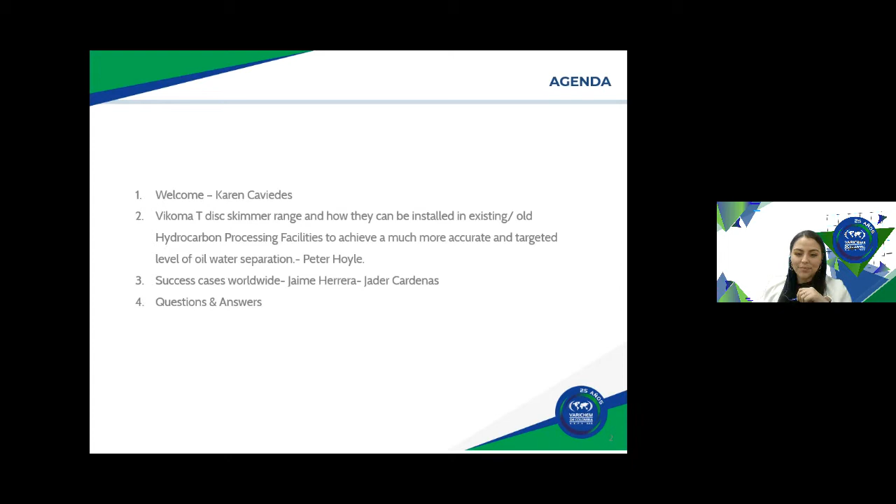Okay, right. Okay, well, good morning everybody. Good afternoon if anybody is tuning in from the UK, where I'm currently sitting. Thank you, Karen, for the introduction. It sounded just as good in Spanish. Thank you for your time today, everyone attending.

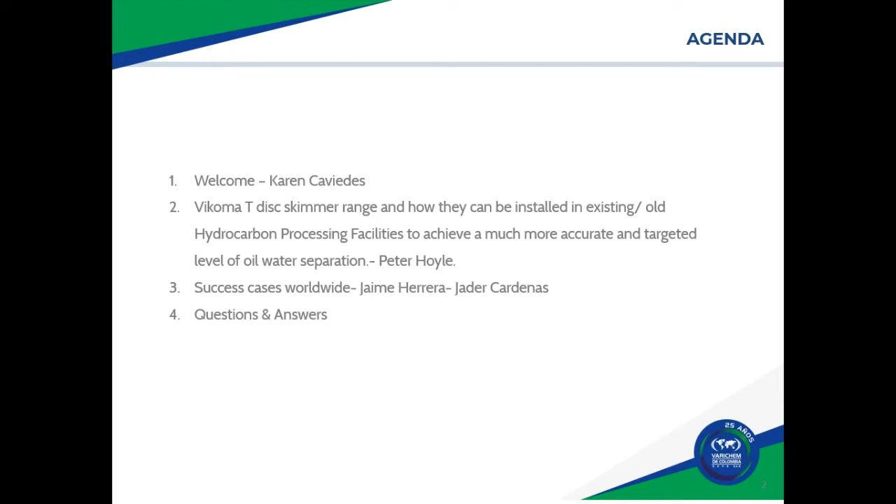So yes, today's discussion is going to be the effective use of skimmers to retrofit or upgrade existing petrochemical facilities. It's quite focused, but hopefully it should be of interest to each of you, and we can explain some of the areas where Vikoma are able to provide solutions here. I will hopefully not speed up, because I do appreciate we have a majority of Spanish speakers, but there are some visitors from North America, the USA and Canada. So, okay, a brief summary of the problem.

Petrochemical facilities are designed and built with a maximum throughput in mind, generally the number of barrels per day that the facility can process. A key part of the process is separating the oil from the wastewater that's used in various steps, whether it's cracking, cutting, dilution, or what have you.

The water separation can be done in a number of different ways, using dedicated separators or separation ponds or pits, whatever the process requires. Essentially, for the separation of oil and water to be successful, it does need time so that two clearly defined layers can form, with oil resting on top of the water.

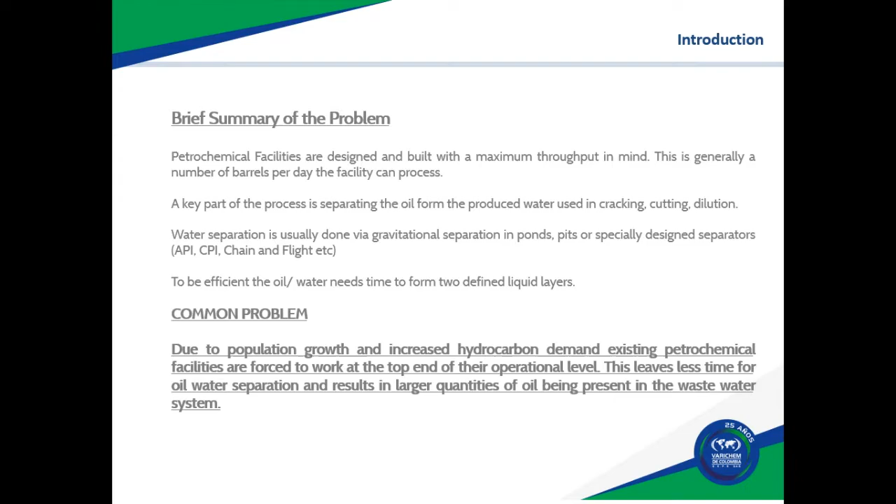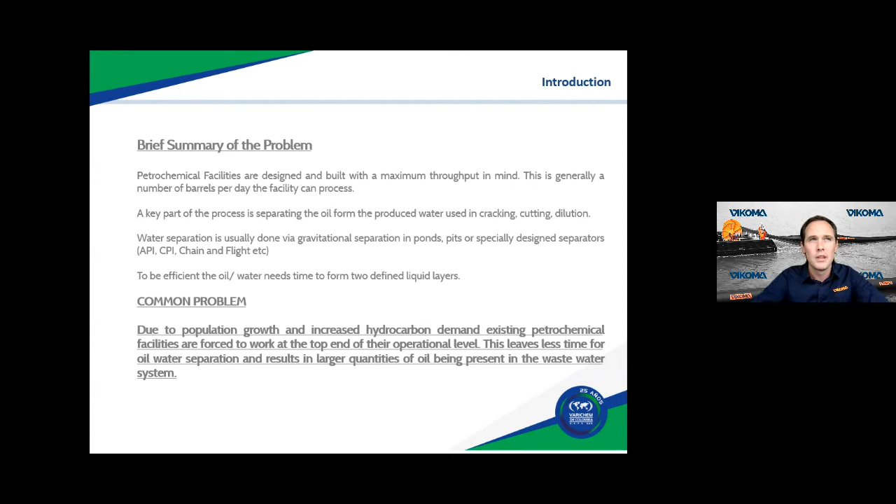One of the other problems we see, if a facility is working to its operational limits, is the fact that populations are getting bigger and people are always moving closer and closer to refineries or petrochemical facilities, which, as we know, because of the nature of the products, can smell of hydrocarbons. You can get VOC gases in the air.

With populations moving closer, it's important to manage the volatile gases in the air that could be near housing estates or villages, what have you.

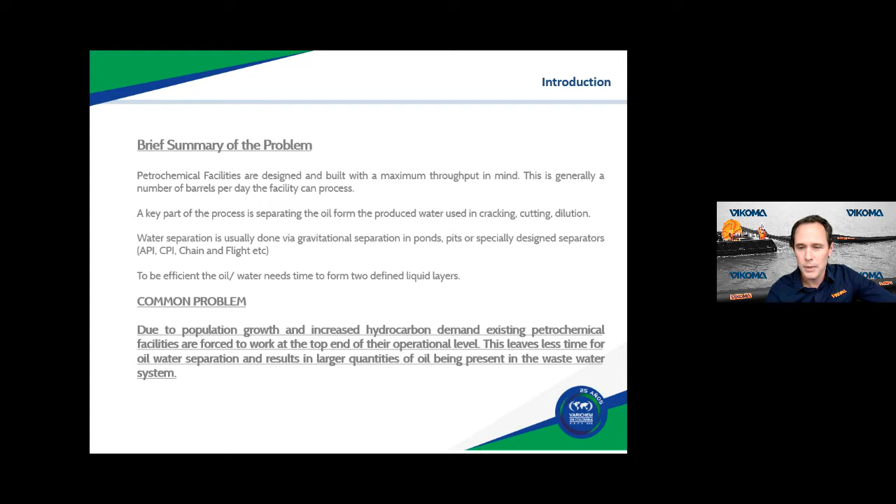So there are two solutions for excessive oil and water buildup and not giving the facility enough time. The first solution is very simple: build a new refinery or new petrochemical facility, which is great—build a new one and everybody's happy.

As we all know, this isn't viable because petrochemical facilities cost an awful lot of money to manufacture—that's the facility itself, let alone the infrastructure that needs to supply that refinery or petrochemical plant. So that was put there as an example solution, but it's not viable for people to spring up and build a new refinery every week.

So the second solution is much more attainable and achievable: to upgrade or retrofit the existing facility so that it is capable of separating higher amounts of oil and water within its process. By helping that system along, making it more efficient and more accurate, the whole facility can process at the higher end of its requirements.

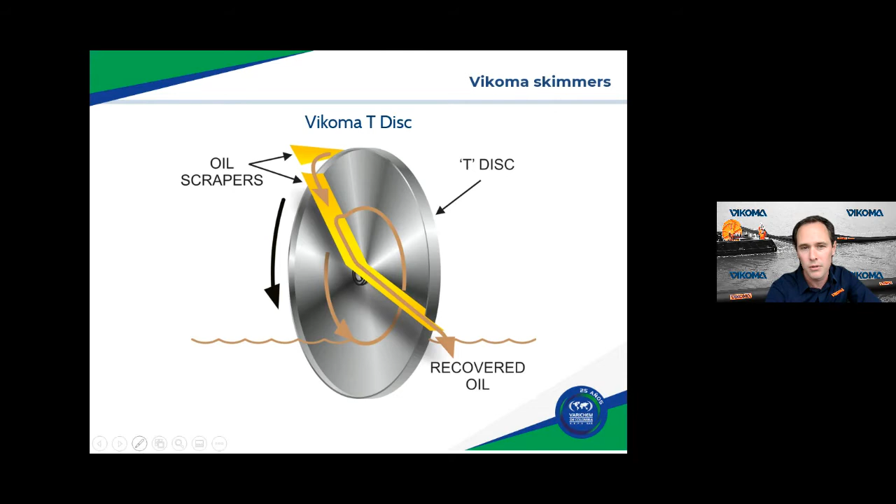So the benefits we have for upgrading and retrofitting an existing facility with industrial skimmers include large cost savings.

It's for a short outlay of cash at the start of the project. These things will last for an awful long time, and they increase the efficiency of the system.

Because of the efficiencies, because they select only the oil and not the water, the oil is much more useful. It has a lower free water content, and it can be reused if filtered.

So once set up and running, these systems are designed to be worked as part of the process. They can be left unattended. They do not need a physical operator to stand by them and use them. And that goes with the safety alarms as well, which we'll cover a bit later on.

They are relatively quick to set up, so you do not need to close the petrochemical facility to install one of these things. It's much like a bolt-on or a drop-in system that can be added to an existing pond or separator, so it doesn't require that separator to be decommissioned and taken apart for this to be added. I covered earlier on they're highly efficient.

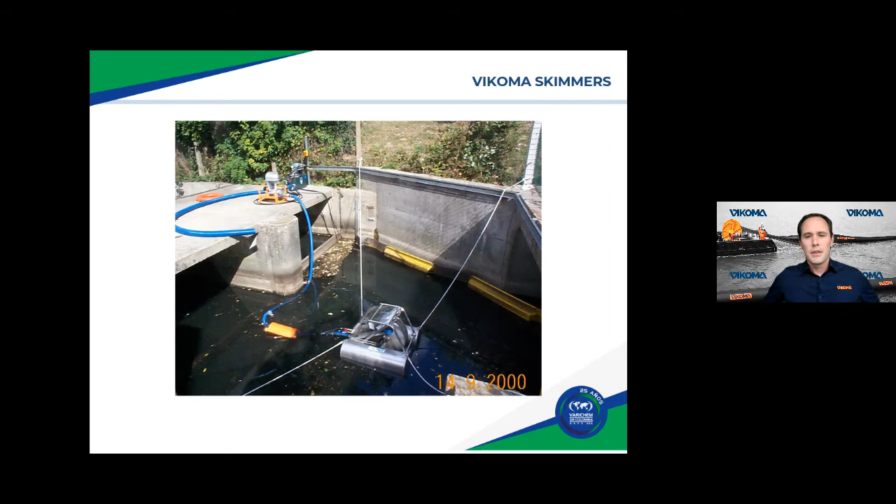Okay, and here's another version. This is called the T9 skimmer. As you'll see, slightly larger, and because it has a few more discs, it can recover more oil. And yet again, placed in an outdoor lagoon where the oil and water is left to settle.

Now, the reason we started off focusing on the ponds or pits, whatever they're called in your facility, is these are not controlled with the level of fluid that runs into them. So for example, the water level or the fluid level within these pits and ponds, depending on how much has been pumped in, can vary. It's not like a dedicated oil water separator which will have a constant level.

This system that you can see on the slide in front of us, if you look closely around that pit, you'll see a week or two before there was high rainfall and the pond or the pit had overflowed the edges. There was still secondary bunding around, but it's a good example to show that the levels of liquid in this pond will increase or decrease. That could be the time of year or the amount of work going through the process.

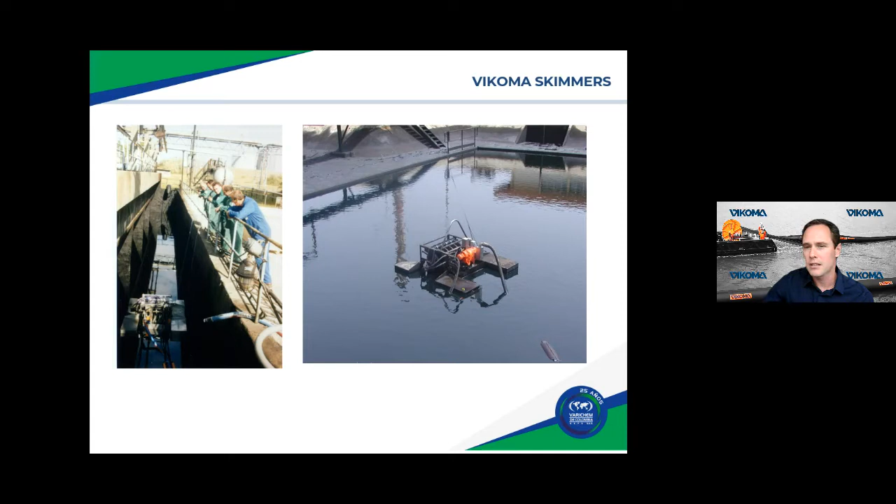I think this is actually a different photo to the one earlier, but it's another floating T9 skimming system, and you can see that the surface of this pit is clear of large clumps of oil, and therefore the volatile gases in the air, the vapors, are reduced massively.

Now these are reduced very, very quickly, which is a good thing if populations are starting to move closer and live closer to the refineries, to the petrochemical plants. They won't be having that fuel forecourt smell in the air continually.

So these systems are designed to run slowly and smoothly, 24 hours a day, 7 days a week, every day of the year. So the yearly maintenance for these would be within 2 hours maybe, a check over to check the pump or check the scrapers on the discs. They're not designed to expect high levels of maintenance on a regular basis. It simply doesn't happen.

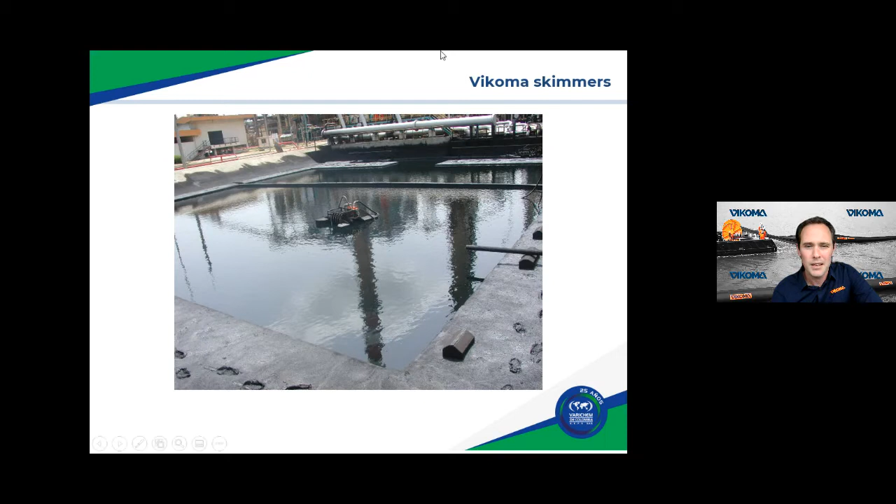So we've briefly talked about the skimming systems, and that works on the same principle as a marine oil skimmer. The disc travels into the oil and water, the oil sticks to the disc, the water does not, and then the disc is rotated through the scrapers and the oil comes off.

Normally, if this was a marine oil spill or in a river, because that spill could happen anywhere, it's very common to use diesel engines that drive a hydraulic system. Within industrial facilities, we're very lucky because we know where the oil and water needs to be separated, in the separators, in the ponds, in the pits. So a dedicated power pack can be plugged into the site supply.

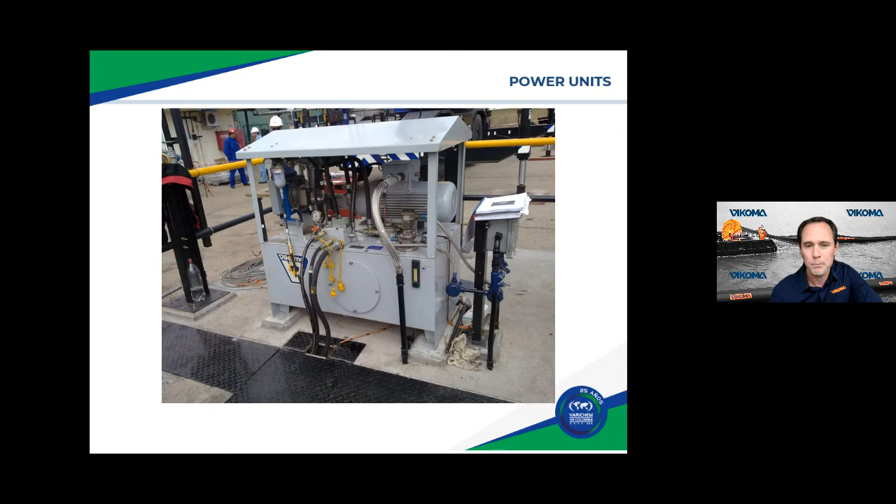Some of the things that make these systems very different, whether it's a T6, the T9, or even the largest T14, would be, first of all, the materials that the systems are made from. These systems are made from a number of different materials depending on the chemical composition of the pond or the pit that they're in. So it's very common to use stainless steel 316.

However, it often happens that there are caustics, high levels of caustics, fluorides, sulfides. Then we can design and build the skimmer out of different types of metal, so hardened steels, duplex, super duplex. That is part of the engineering towards these systems, because if we find out that these are in sour water or a high chloride solution, simply changing the metal that it is manufactured from could mean that the system lasts for many years before the aggressive substances start to damage it.

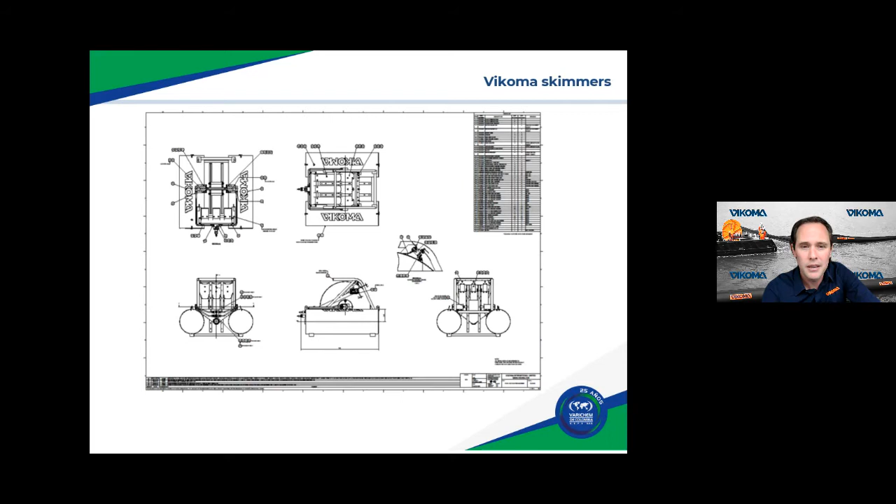So this is the T6, the smallest unit. You'll see it is hydraulically driven, but it does not have a transfer pump. So this would normally have a freestanding transfer pump accompanying. Next slide, please, Karen.

Depending on the customer's requirements, these pumps do change. Sometimes there is a requirement for it only to pump the oil a short distance; other times it's a much increased distance. So that is captured within the document package and requirements by the engineers who design the system. We appreciate that petrochemical facilities all over the world are different. They deal with different oils and different products, and they have to transport that oil to different destinations. So therefore the systems need to be quite bespoke to suit their exact area of operation.

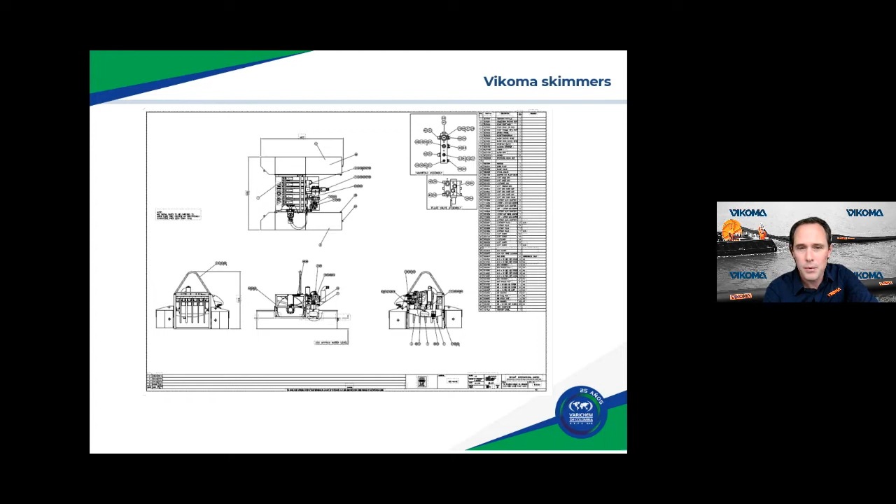So I started off mentioning the high efficiencies. These skimmers will collect between 95 and 98% oil, less than 5%, between 2 and 5% free water. The conventional methods for skimming that oil, like I mentioned, the overflow technique, rely on an operator to accurately operate the overflow valve so the oil flows first. If water is captured in that surface layer, then that goes as well, and it all adds to the oil-water ratio. So the T14 can do 14 cubic meters, or 14,000 liters, of almost pure oil per hour.

And quite often when these systems have been installed, that oil has such a low water level that it has a value, it has a use, and it can often be used to drive the slop system of the petrochemical facility with very little extra process. So by targeting these high amounts of oil and leaving the water alone, in the first phase of interception, the first oil-water separation, it drastically takes the pressure off the rest of the process downstream from that.

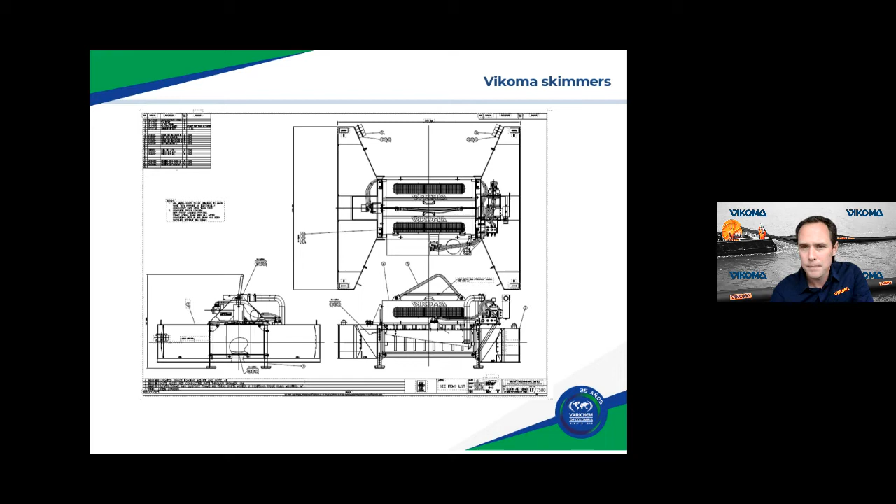Essentially, whether it's class zone classifications or ATEX, it doesn't really matter to us what classification body the facility uses. The equipment can be built with its area of operation in mind and comes with its documentation package. So if, due to a number of chemicals the facility is dealing with, the area is very volatile and explosive, it could be an ATEX Zone 1 or Zone 0 skimmer, ATEX Zone 2 or Zone 1 power pack and pump.

Essentially, we capture all of these details at the initial inquiry phase, and all of the design and engineering work is done with the exact facility in mind. These systems wouldn't work as an off-the-shelf catalogue product, because one facility might need an ATEX Zone 0, while another may not require it at all — it may only require ATEX Zone 2. So they are very bespoke, but our in-house design engineering team are specialists at this.

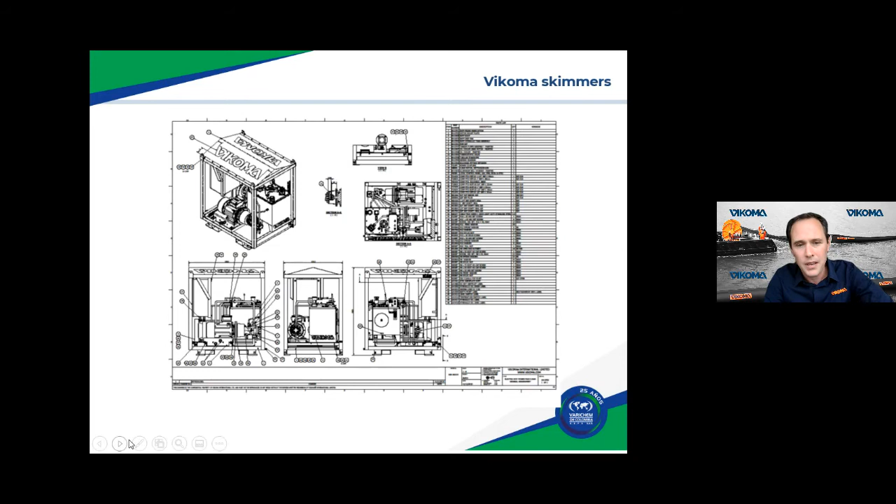So next slide, please. Okay, I put this in.

It's a very new project, currently being installed, but it's a good way of showing that now that solar technology is developing, these are being used to run process equipment within some of the petrochemical facilities.

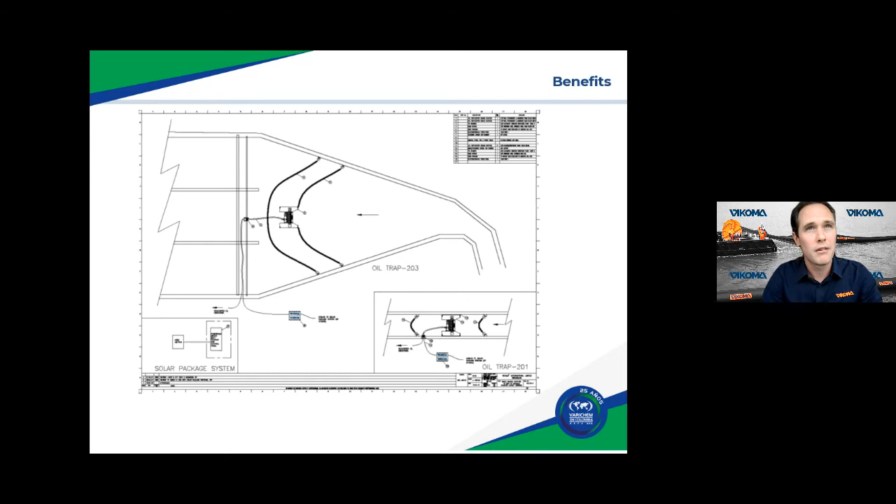I wanted to put this one in just to show that there are developments out there for environmental purposes, in case the environmental legislation is increasing in your particular facility. These things don't just have to be plugged in and sucking power from the grid, when solar options are there to assist.

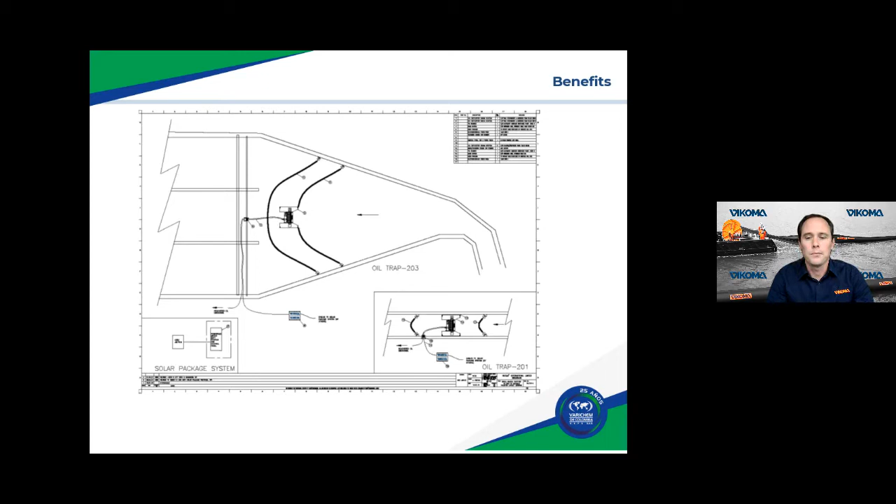Next slide, please. So I've included the technical data sheets for the skimmers. I've shown some of the images, and assuming with your access to the presentations in English or Spanish, anyone watching this will be able to look at the data sheets to get a rough idea.

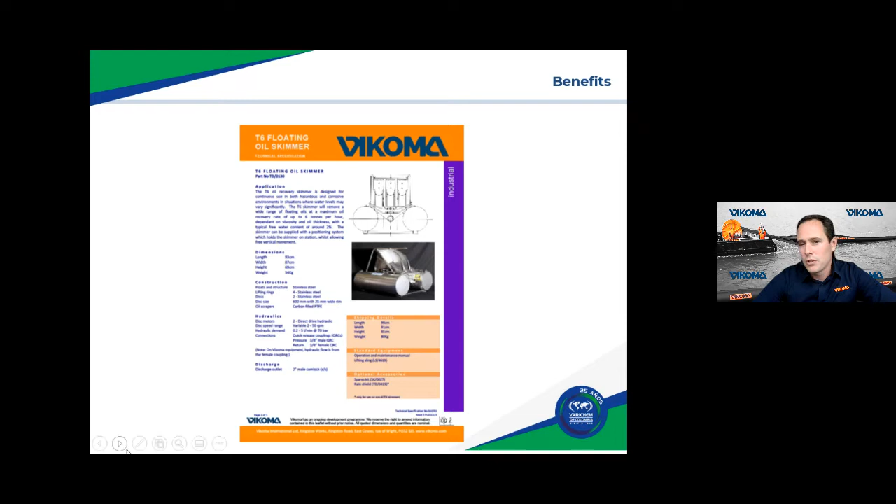If we need only a small skimmer because the pond is relatively small, then you may need a floating T6 skimmer. Likewise, Karen, if you can flip through, we should then move to the T9 and then to the T14. This should help give a bit of insight into the types and sizes of the skimmers and the amount that they can recover.

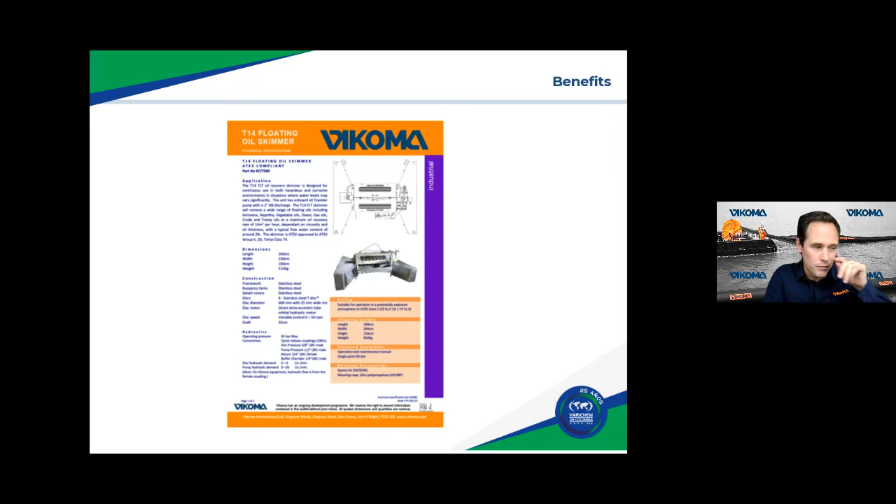What I would say is, if anybody attending this knowledge experience thinks that the industrial skimmers could assist in upgrading their facility, you don't need to make a decision on the technical specifications shared today. If you reach out to Varichem, or to myself, or to the regional representatives of Vikoma if you are not in Colombia, these items are put forward as a very tailored package.

We could provide a site data sheet to understand which chemicals are present, how much oil needs to be removed, if the water level changes, and how far the oil needs to be pumped. All of these things are captured to make sure that the right equipment is specified at the start. These are just a useful point to look at. Next slide, please.

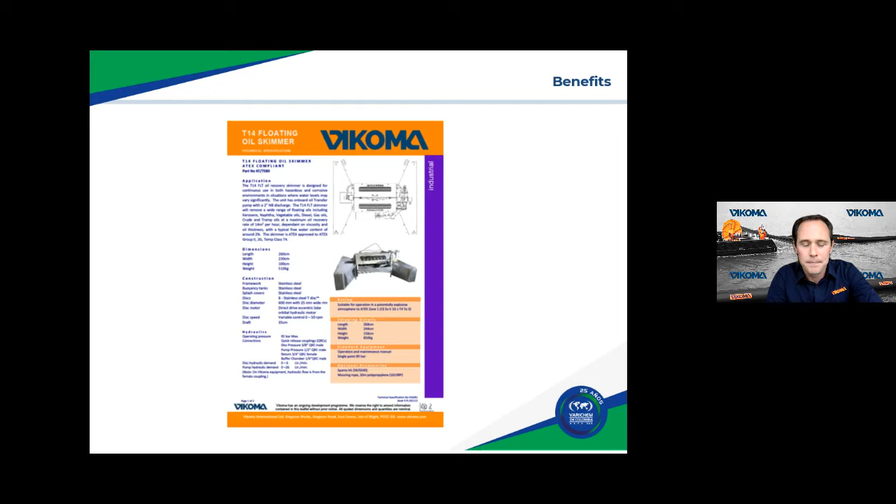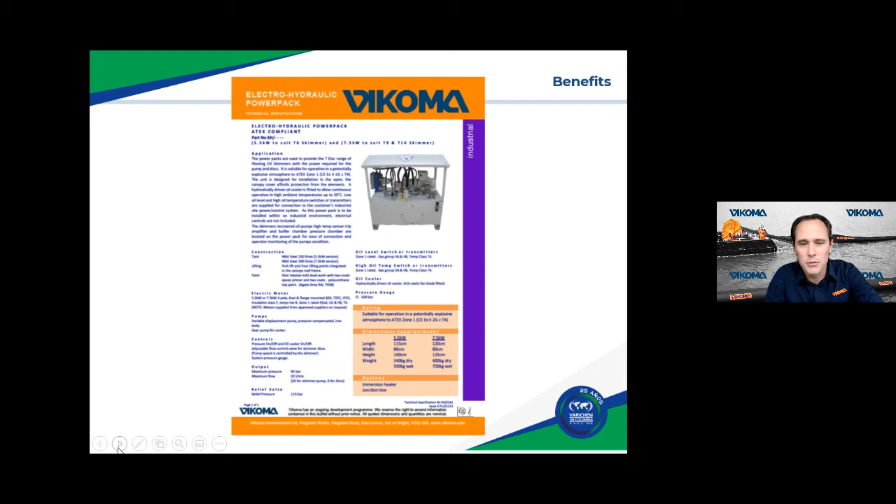So we do have some case studies. Karen, can I just ask, is Hader going through the case studies, or is that? Yes. Okay, so I'll have a drink of my coffee and come back to you when Hader is done.

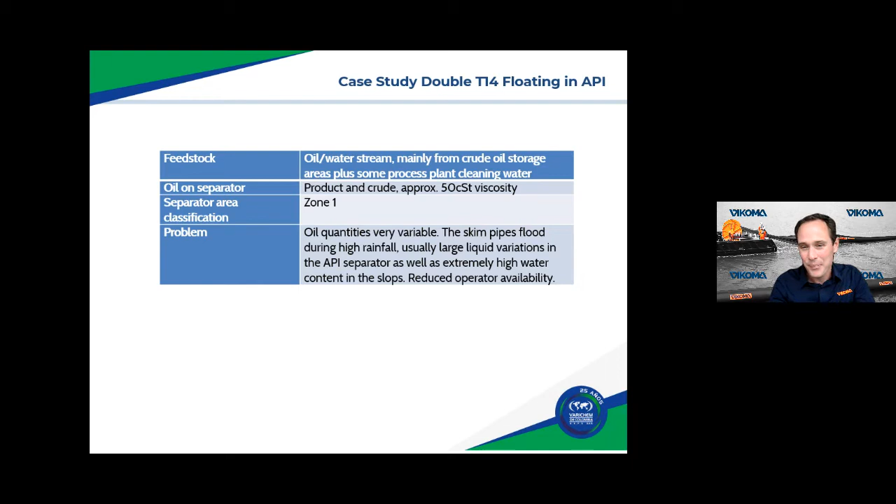He is a commercial manager of Varichem of Colombia. He's a chemical engineer from the Universidad America, with a specialization in senior management, basic training in business coaching, with more than 13 years of experience in the industry. And he has worked as a drilling fluids engineer, operation coordinator, and commercial director.

Okay, fantastic. Thank you, Hade. So, up until now, the equipment was floating skimmers with electrohydraulic power packs, and quite a simple separation method, which is a pond or a pit. You leave the product in there, it forms two layers, and then you can switch on your skimmer and remove the oil.

This next section is where industrial skimmers become more focused. For example, the oil water separators built as part of a petrochemical facility are dedicated pieces of equipment with their own process. Examples include API separators, CPI corrugated plates, and chain and flights, where the oil-water mixture is left to settle, but the sludge is removed from the base of the separator while surface oil is driven to a collection area.

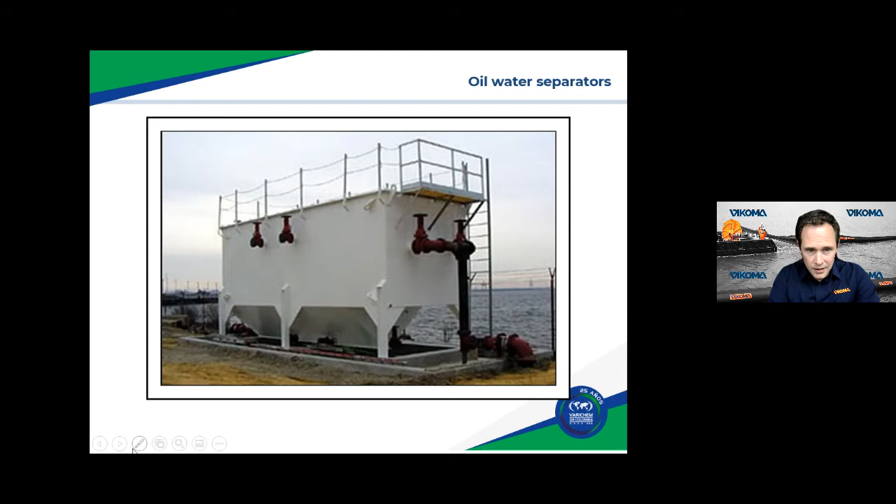Okay, so here we have an API separator. This is actually what we call a dual or double bay separator, so you can see the wall traveling down the middle, a vertical wall that separates each of the bays. Within this separator, the oil floats to the surface, the sludge sinks to the base, and both are removed from dedicated ports.

Now, this API has been retrofitted already with what I would call a bridge system. The skimmer is held in position at the water surface by that fixed stainless steel bridge, and the water layer remains at a constant level. So there is no high liquid level or low liquid level; the water level is constant, and therefore there is always an interaction between the discs and the liquid layer.

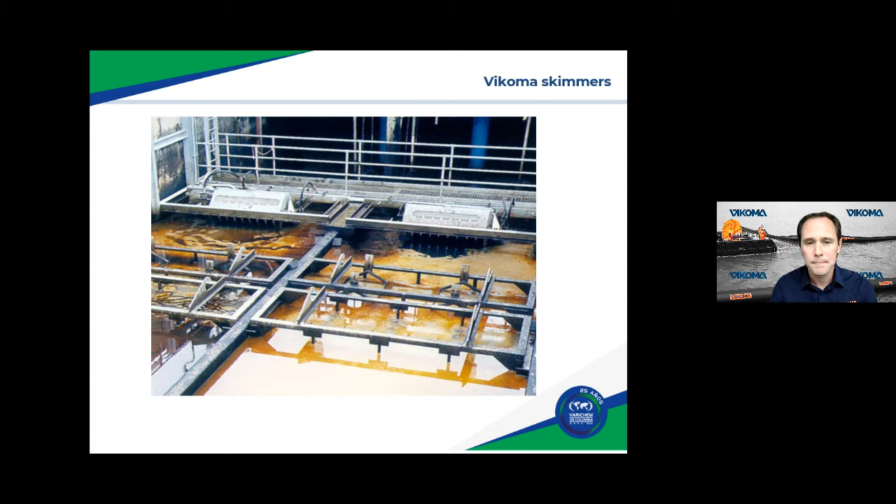So these are T14s, and as you can see, this double API separator now has the capacity to take 28 cubic meters, 28,000 litres per hour, of pure oil from these two bays. That is a large amount of oil to be taken out, and that drastically reduces the amount of oil in the next system along. Next slide, please.

I talked earlier about skimmers being designed for their area of operation. Just to go back to that, this is in the heart of an API separator, which is also in the heart of a refinery, not like the ponds or pits we talked about, which are far away so the smells do not annoy everybody. These are right in the middle of a very volatile working environment.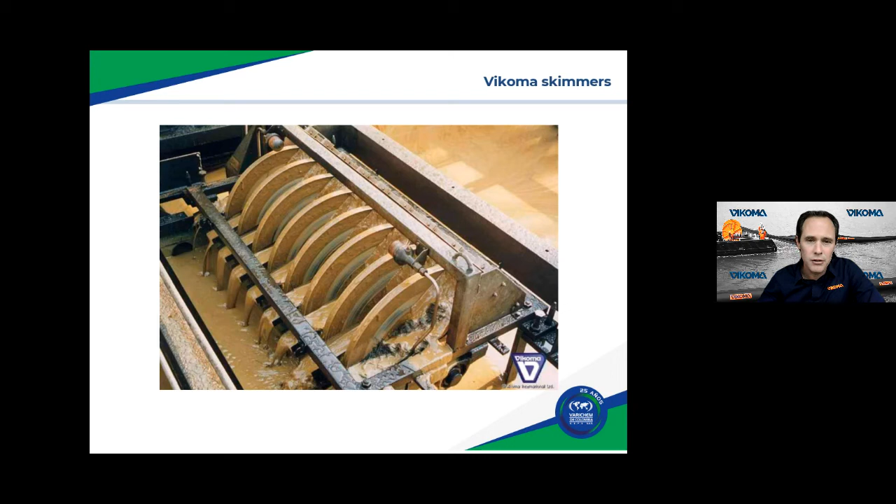This T9 system that you're seeing now is delivering 98% oil, less than 2% water, into a closed C pipe. The C pipe is lifted into a vertical position so that no free water can get in, only pure oil is being poured into it. So it uses the existing piping, the existing C pipe from the separators, but it drastically increases the efficiency of that C pipe, of the API separator itself.

Without stealing Hades' slides for later on - when you're talking about retrofitting an existing separator, they are nearly all fitted with C pipes. It's an inaccurate way of getting the fluid in to be pumped away, but it is non-selective. So this all of a sudden takes the unselective C pipe and turns it into a very efficient, selective method of transporting the oil.

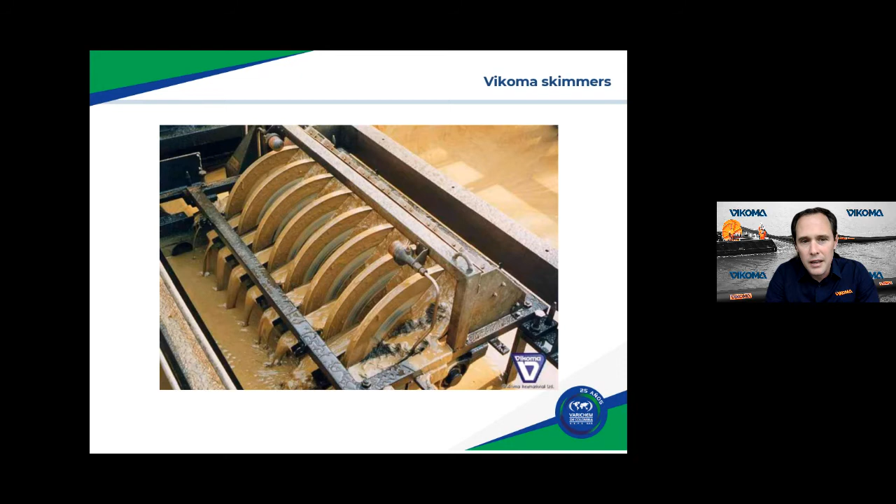So this is how the bridge systems work. The beauty of this, like we saw in the double API separator earlier, is if you need up to 14 cubic meters of oil recovered an hour, you can have a T14. If, like some of the largest refineries in Saudi Arabia, you need more than that, you can just have one T14 next to another, next to another. I think the largest I have heard was 8 bridge systems side by side in a large separator.

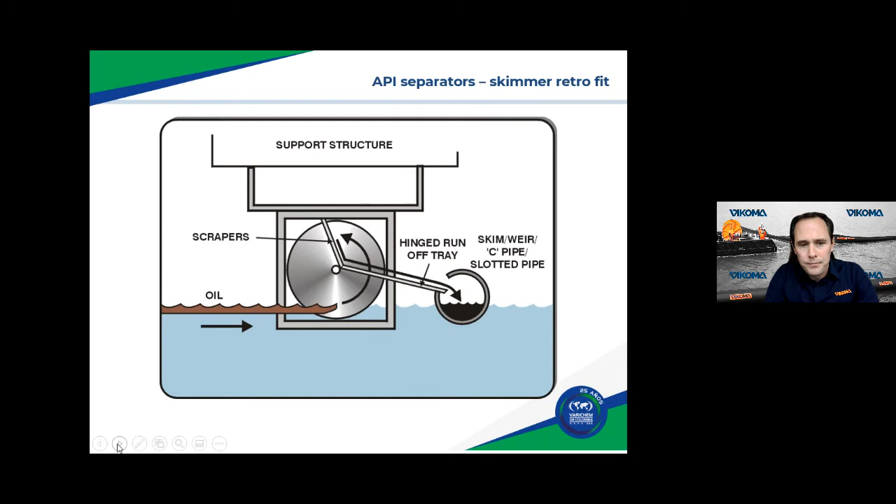It looks quite simple, but the separator design for this is the design used by, I believe, Siemens Water Solutions. We have lots of these systems built into existing separators, whether manufactured by Suez, Veolia, Siemens, Westech - there's a whole list of companies who have built oil water separators in the past. If those separators are at their efficiencies, at their maximum outputs, then this system can be installed to drastically improve the oil recovery rates. By quickly removing that oil, you take away the smells because the oil does not spend so long on the surface, and it also allows more surface area for liquids to rise and gather to be then removed away.

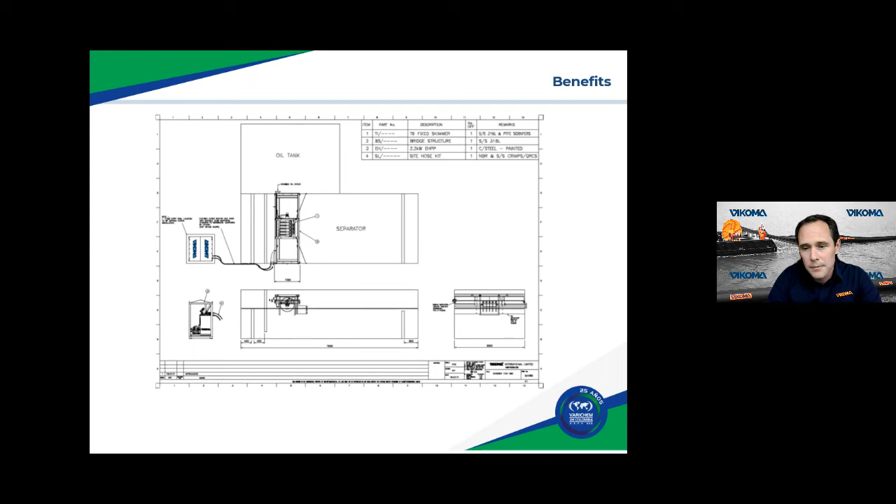Fantastic, so I included this - it may be covered by one of the case studies later, but this drawing just goes to show that existing refineries weren't built with disc skimmers in mind. They were built with a process in mind, but then through a number of reasons we have talked about, the skimmers may need to be added to increase efficiency or to increase oil recovery. So these APIs were actually situated quite a long way below ground.

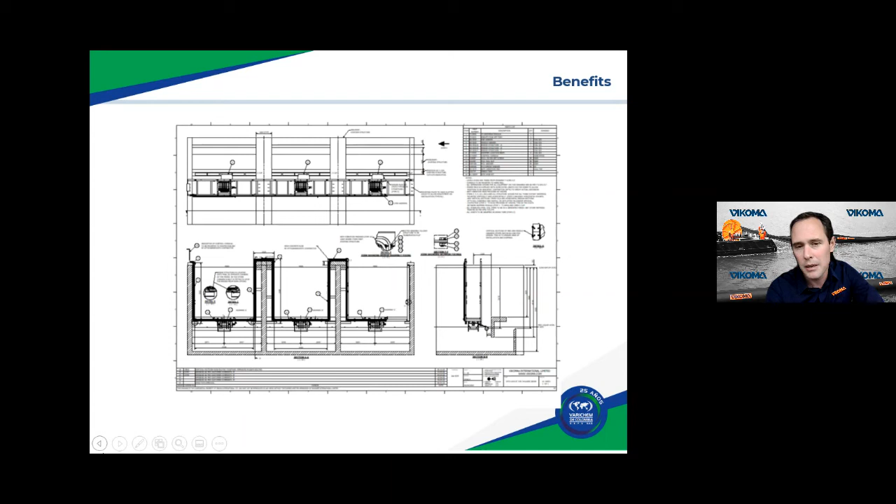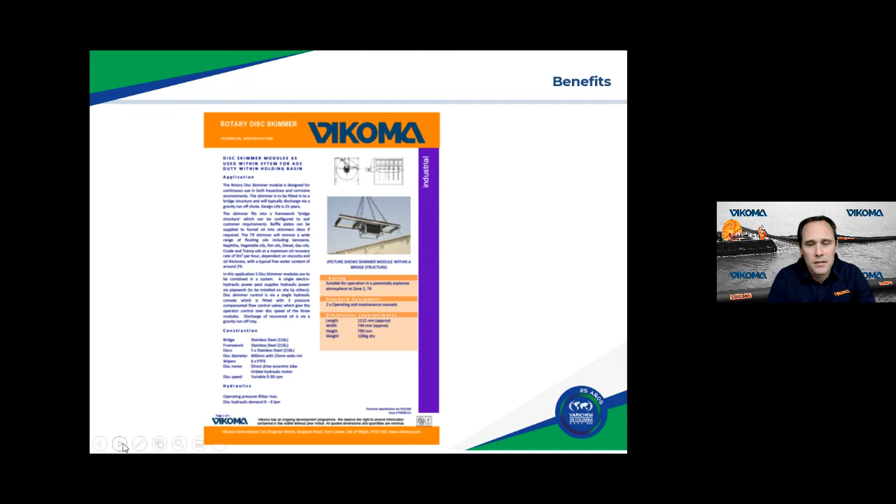Okay, am I handing over to Hadair again? Yes, thank you, sir.

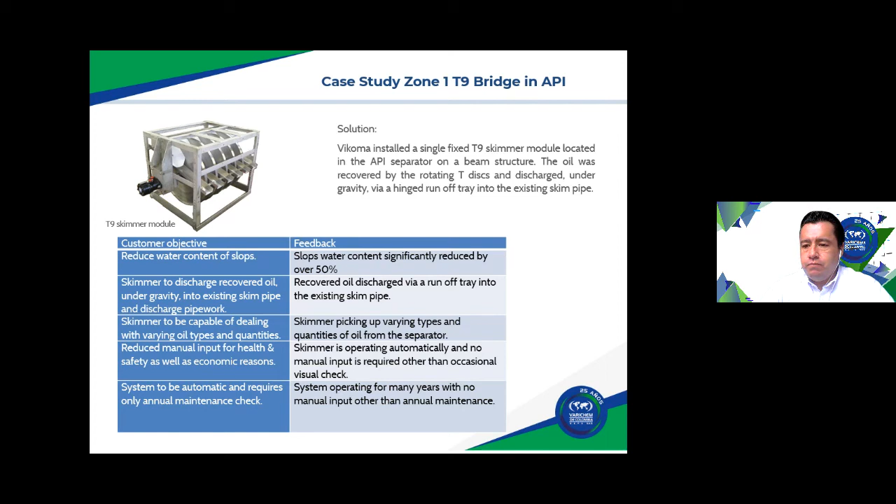El problema que tenían es que el separador no estaba siendo óptimo en sus descargas de aceite y estaba teniendo alguna especie de leak, se estaba pasando algo de este fluido a un río cercano. Entonces es bastante complejo el escenario.

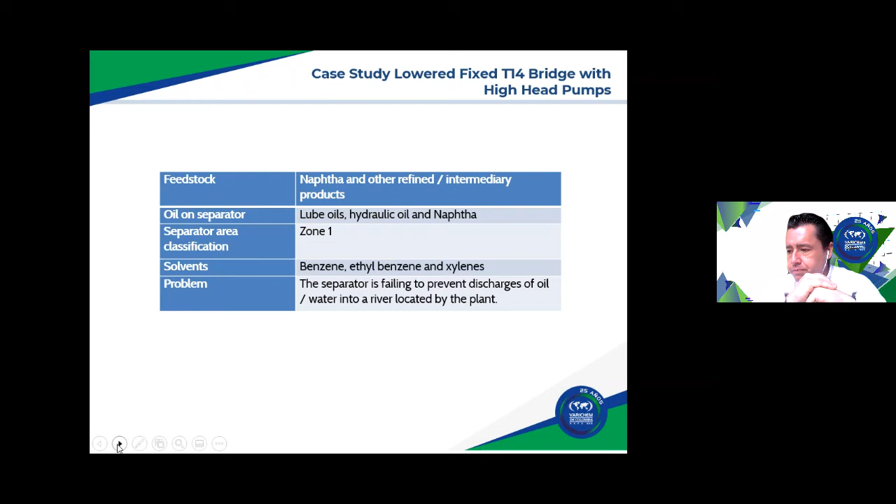Los resultados que se obtienen es una operación continua. Ese problema que tenía el cliente de pasarse el fluido a este río se redujo porque también se le hicieron algunos arreglos a las distancias y a los diámetros de las descargas de las tuberías que ellos tenían.

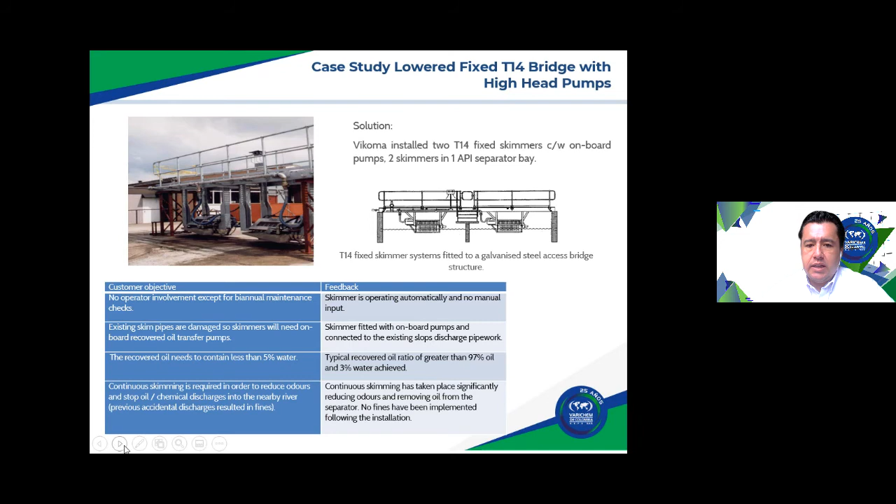Siguiente, por favor.

Este otro caso es un T14, la instalación de un T14 también en una estructura de puente on-board, con una bomba instalada dentro de su frame. Este separador tiene algo de crudo, algunos productos ligeros y presencia de benceno y etilbenceno.

¿Cuál es el problema? Que toda la tubería no estaba haciendo lo suficiente para poder recolectar todo el aceite, y estaban obteniendo por lo menos un BSW del 80%, que es bastante alto.

Necesitaban también reducir sus tiempos de operador, ocasionados por estos problemas y esta baja eficiencia de las tuberías. Tenían que invertir varias horas hombre interviniendo las líneas para poder mantener ese BSW en el 80%.

Siguiente, por favor.

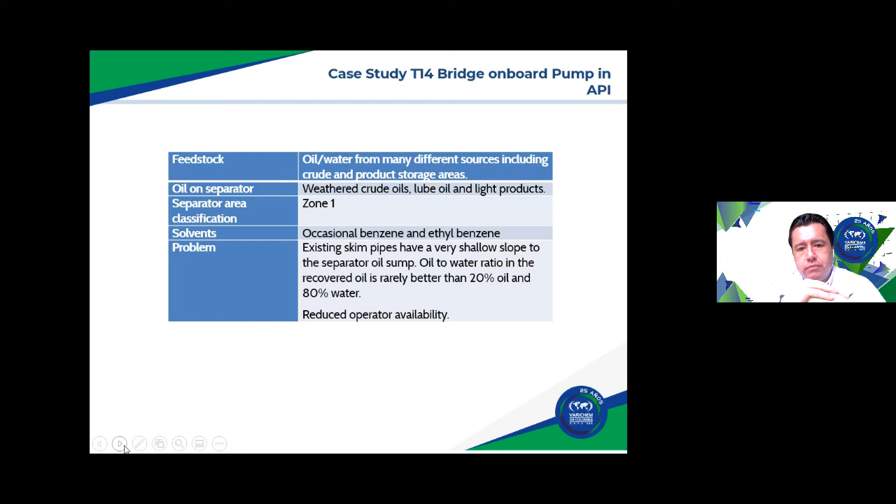Los objetivos del cliente en este momento: nos solicita que no puede continuar con las horas hombre de intervención en estos sistemas ya instalados, y los skimmers necesitan descargar en las tuberías desnatadoras directamente. Por tal razón a estos skimmers, los onboard pump, se les instalan las bombas de descarga para dirigir todo el fluido recolectado hacia las líneas de descarga de las instalaciones que ya tenían preinstaladas.

Se les hizo también un mantenimiento y se ajustó toda la línea de fluido para no perder la contención de todo el fluido recolectado. Su mayor problema, un porcentaje de agua del 80%, se redujo a un porcentaje de agua del 5% ya con la operación de estos dos skimmers.

Siguiente, por favor.

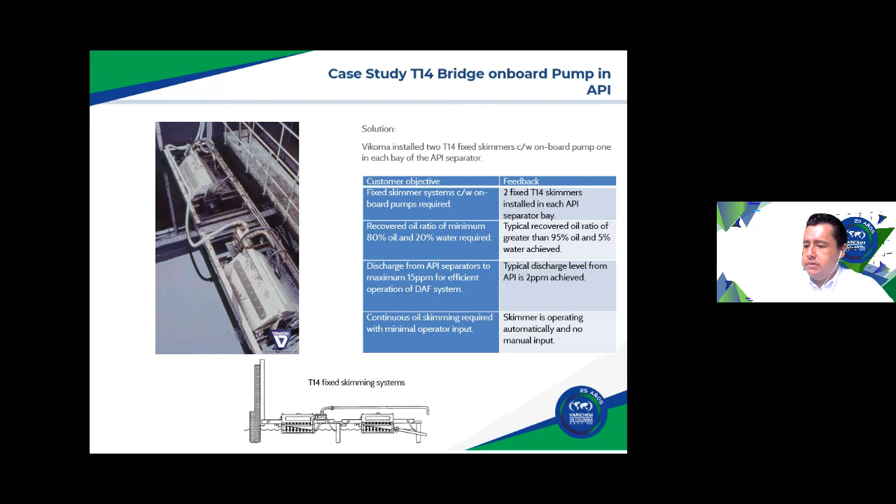Okay, is it back to me? Right. Okay. Yes, sir. Go ahead, please. So...

This is I believe the last batch of skimmers that we will focus on, or the last area of separation within petrochemical plants that we focus on, and it's what we call in-tank skimmers. I believe I've been very kind to Hader on this one, and I've not given him any case studies, although they do exist. If this particular type of skimmer is of interest, then please let me know, or let the guys know. We can certainly provide case studies and more information.

So in-tank skimmers is a term we use to describe where oil-water separation is required from a sealed tank, so a tank that is completely lined but enclosed with a roof as well.

The same process happens with inside tanks. The oil and water will separate, but when the oil gets to the surface it forms a layer and needs to be removed. The reason in-tank skimmers are different is because the vapors, the volatile gases, have nowhere to escape to. They cannot escape to the environment, and that creates a more volatile environment for the skimmer to be situated.

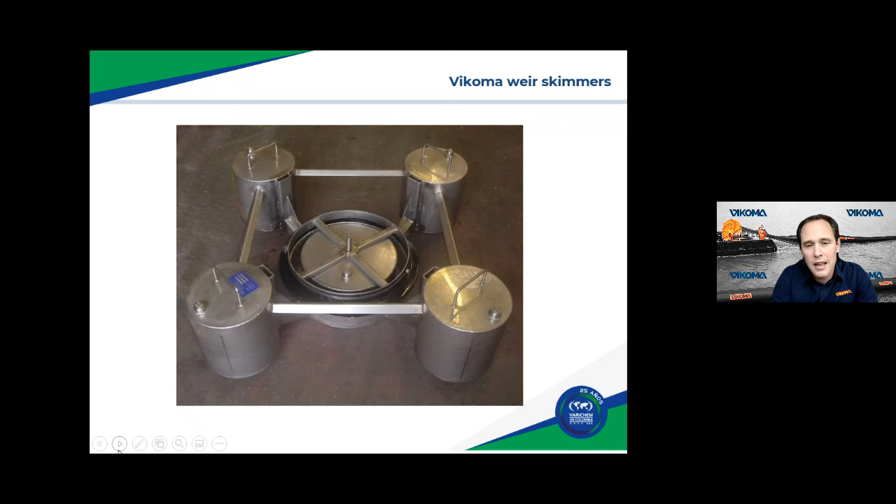The central part of the skimmer you can see here is actually being tested, because normally these things live inside dark tanks and never see the light of day. You can see this is flowing over only a few millimeters of the top surface of the liquid.

Imagine the overflow lip being larger, not a few millimeters but say 10 or 15 millimeters - then more water would overflow into the skimmer and the separation would not be as accurate. So this skimmer has a floating lip to reduce the thickness it takes, and importantly it's designed to remain inside the enclosed tanks, with no moving metal on metal parts, so no risk of sparks.

No risk of static. I believe some of the photos shortly will also show the system when it's being manufactured, not covered by water and oil, so you can get a better view.

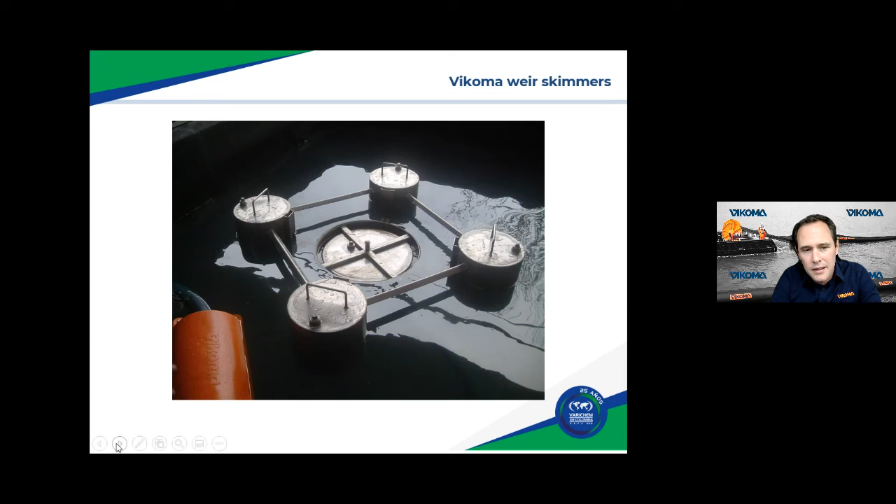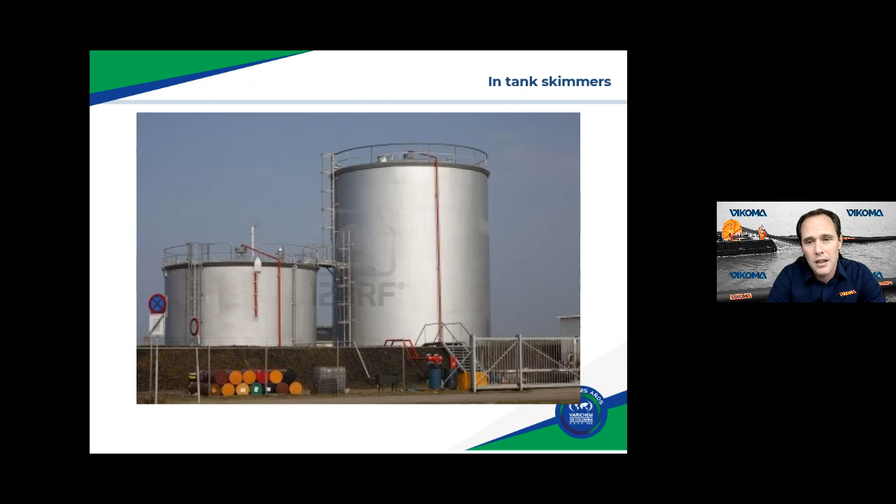This is a classic example - we saw earlier the very large oil storage tanks, and to the side of those you would have smaller wastewater cleaning water storage tanks, where high pressure jets feed from these water tanks, clean the large oil tanks periodically, and then the dirty water would be returned here for settling, skimming, processing, and potentially reuse.

Inside of these tanks, we have the very small, but visible, floating skimmer at the waterline. But these tanks have a huge variation in their low liquid level and high liquid level lines.

The articulated arms, because of the metal work involved, cost more at the original purchase time. However, they require much less service and maintenance. The pipes are not consumable - they have a 10-year plus lifespan, and that original outlay of cost at the start is covered with years and years of less service maintenance.

That price is covered. We have developed these a lot recently, so you'll see on the sections of articulated arm there are stands, so that at the low liquid level, when the tank is drained, the pipe work rests on the floor so it does not get snagged or caught, and the system is designed for low level storage as well as full level operation.

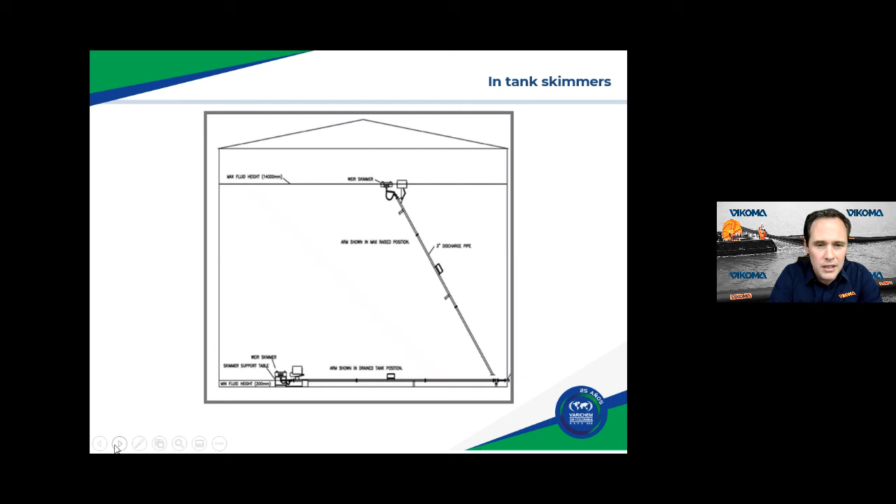All of this system is designed to go inside of one of those storage tanks. Firstly, it is all detachable. The skimmer can be broken down so that every item can be lowered through the staff access hatch of the tank. So there's no worry of one of these systems going from the UK to South America and not being physically able to go inside of the tank. They can be broken down into smaller parts and then simply reassembled inside of the storage tank.

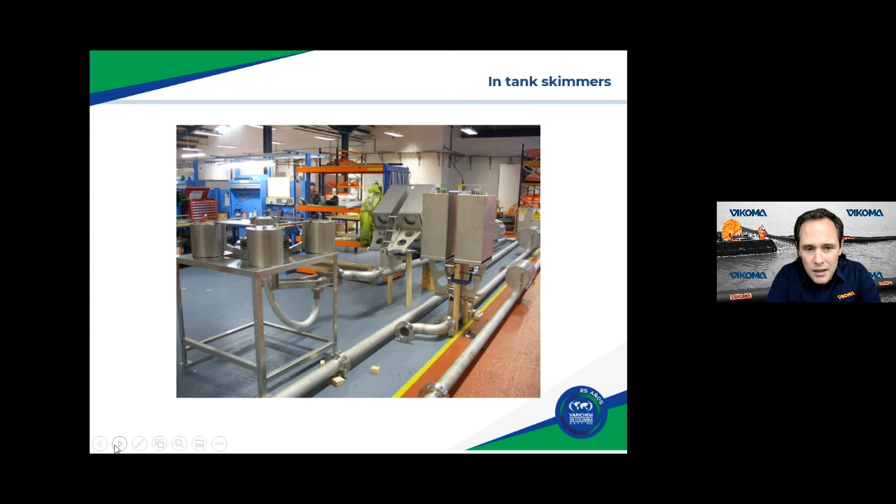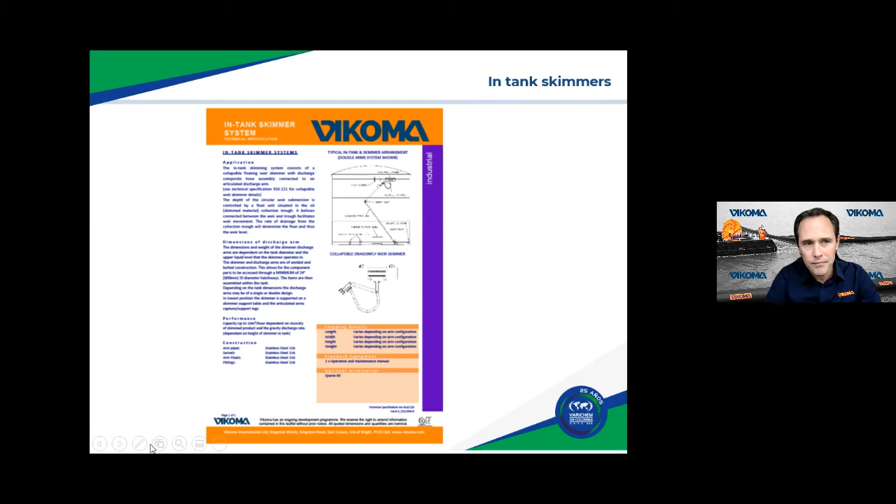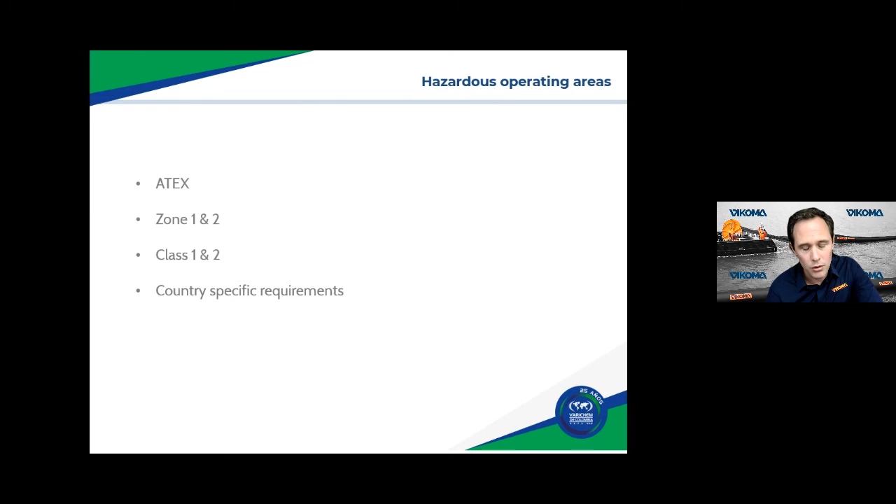Like I said, the skimming systems can be ATEX, zone 0, 1 or 2, or class 1, div 1, 2. It depends on the country specific requirements. Our friends in the United States generally use class, but other parts of the world adopt the European method of ATEX, and some parts of the world have their own international standard that they use. We've got lots of experience converting between the styles of standards so that the documentation package matches what the customers need. Next slide, please.

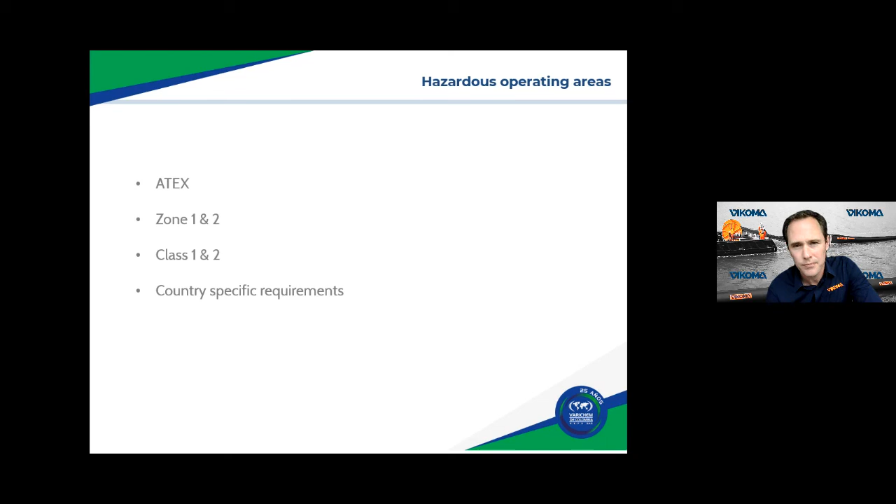This isn't just for the in-tank skimmers, it goes across the disc skimmers as well, but it's very important, and all of the process engineers who deal with these facilities will appreciate this: the equipment is tested and badged with its site safety hazardous operating badges, and all of the documentation packs are provided to the customer, but also stored internationally in the SIRA international database. This is a worst case scenario: if we provide a skimming system to a petrochemical facility, and a few years later there is an incident at that facility, whoever purchased this equipment will be able to access the safety documents to show it was built to the correct standards and it was not this piece of equipment that caused the incident. Sometimes the documentation is just as important as the equipment itself.

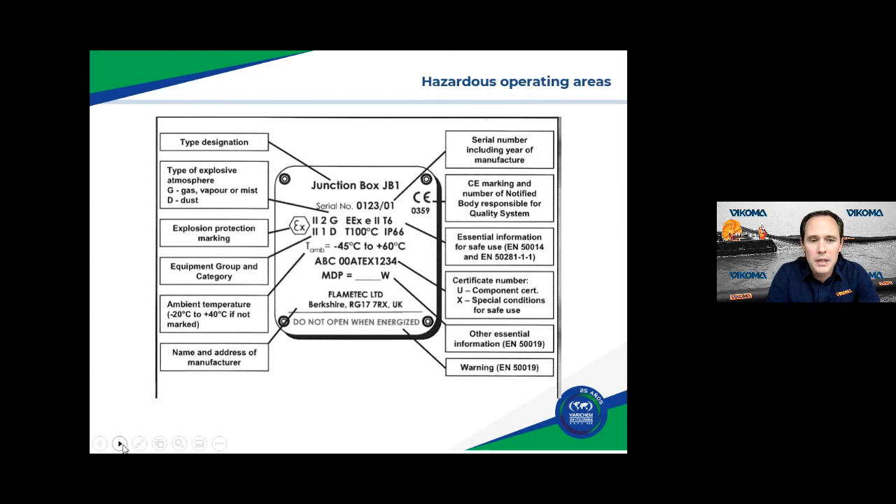Next slide, please. This also probably covers gas certificates, gas markings, all covered by the engineering and documentation package. This isn't required when people buy a marine skimmer for an oil spill, but for any specialist equipment into a petrochemical facility, these kinds of badges and this documentation need to be done to protect the operators, the facility, and the people that have invested in the equipment as well. Next slide, please.

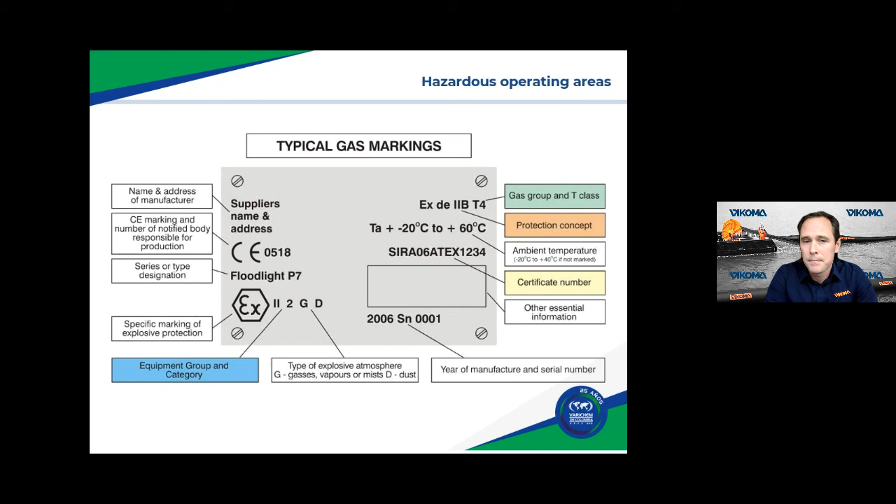So the engineering and documentation package, and Vikoma have manufactured industrial skimmers for many years now. Vikoma are listed as the approved and preferred vendor for all industrial skimmers for Saudi Aramco, the largest refining company in the world. So wherever Aramco are refining, if they have API separators, CPI separators, or outdoor settling ponds, pits, legacy pits, they will go out to tender for people to supply the separators, but they will say the separators need to come with the Vikoma disc skimmers. Likewise, if they purchase an existing petrochemical facility, they will purchase the equipment to overhaul and upgrade the systems using the skimmers.

So it's a great list to be at the top of, but with that responsibility comes huge requirements. In the engineering and documentation packages, we have to prove things like material identification, weld strengths, paint thickness, system recovery rates, and safety features. Everything needs to be tested and proven to a very strict level. But that's something we've done for many years, and it's something we can easily replicate for other customers. Not everybody has such a high requirement on the documentation package. If your documentation package is slightly more simple and less onerous than Saudi Aramco, then great, it's reflected in the amount of hours engineering, and it doesn't cost as much.

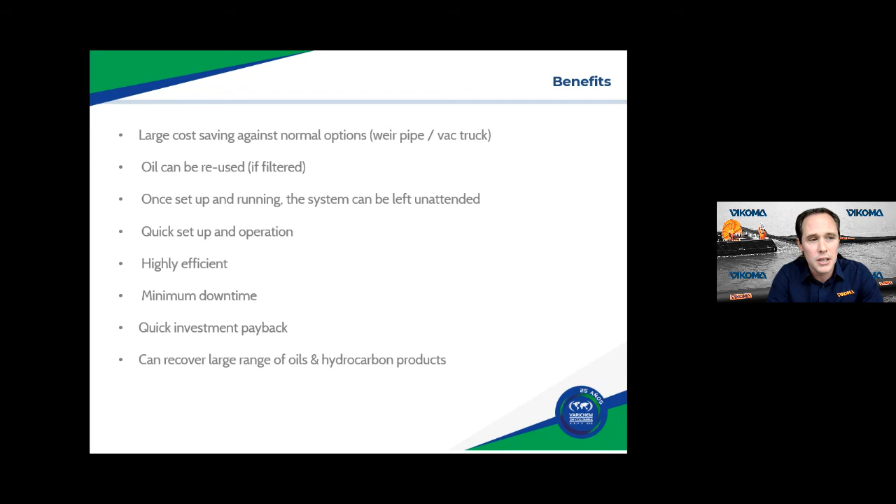So we have the VFD, which connects to the control room. Essentially the operator in the control room can see if the system has shut itself down because of a safety risk, and that's when they can send somebody to check. It doesn't just continue working until a person physically spots a problem, because often that would be too late.

So, highly efficient and minimum downtime. It's a very quick investment payback if you look at the price of the high quality oil it has recovered compared to the lower price for the oil water mixture that unselective methods choose. And I believe, as Hade may have mentioned, I saw some of the different oil types and chemical types in his case studies. Some of these are in crude oil facilities, some are dealing with much more volatile ends, naphthas, kerosenes, and things like that. So it can cover a large range of hydrocarbons.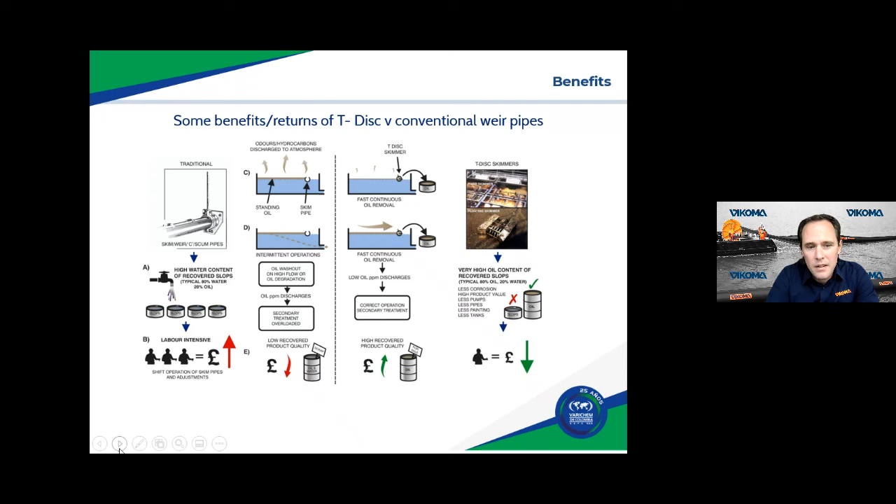Hey, and I can't remember that photo being taken, but yeah, okay. If you have any questions, then we'd be more than happy to answer them. And thank you very much for your time. Thank you to you, Peter.

We have one question here, and it asks how to control uniform flow and turbulence conditions in the APIs. So, how to control uniform flow and turbulence conditions in the API and CPI? Yeah, well, the turbulence, so...

We talked about the floating skimmers at the start in ponds and pits. And if the API separators have a variable liquid height, then we would always offer a floating type skimmer. So the skimmer would always remain on the surface, and therefore the discs would always interact with the oil water interface. The flow rate - these are variable flow rate skimmers. So for example, if you have a very high oil input into the separator, the disk speed is variable. It gets set to match the oil water intake on the separator.